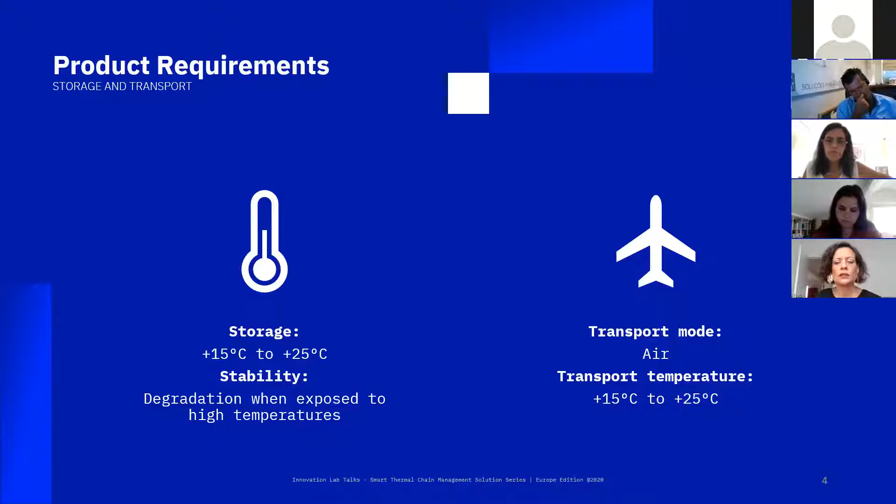Also, when it comes to transporting these products on a continent basis, like a Europe basis, the transport mode would be by airplane. Normally transport temperature can be maintained and should be maintained between 15 and 25 degrees centigrade. The issue arises when we look at the logistic flow of getting these products from point A to point B in Europe.

The products are in the storehouse, and specifically when it comes to temperature control, temperature is controlled during storehouse, and they go on to a truck that does the traveling from point A, the storehouse, to point B, the airport. During this transportation, temperature is completely maintained in the truck.

Then it comes to airport handling, out of the truck into the airplane, so airport handling and the tarmac area. And it's not possible to control the temperature there, and this is a problem we face.

And in air travel, during the traveling in the airplane, the product will maintain its temperature, 15 to 25 degrees centigrade again, with stability.

When they land in point B, we have again airport handling, and maybe we have a cool dolly. In airport handling, it's not possible to control the temperature. If the airport has a cool dolly, you can control and maintain it mostly. But if not, this temperature again suffers some changes.

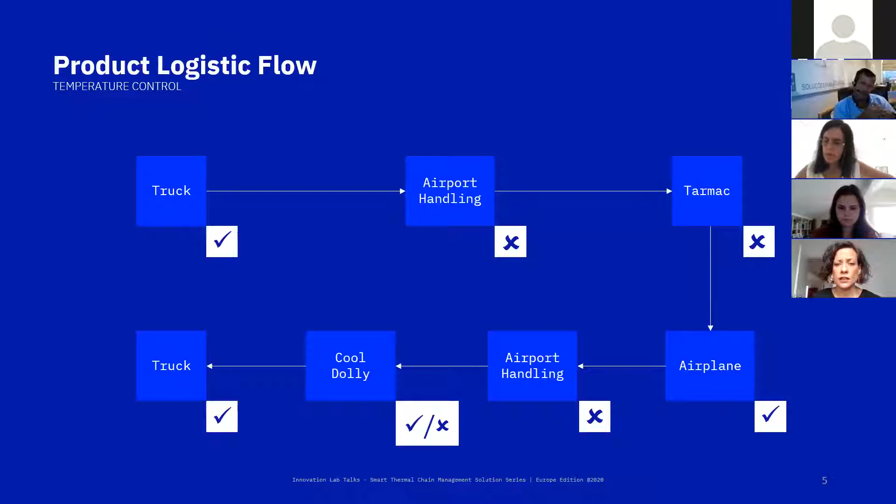Then the product will go again into the truck, and it will face again a controlled temperature setting. So as a summary, we can say that although companies and transportation experts can guarantee thermal chain integrity during transportation to and from the airport and during air transportation, the same does not occur during all the cross-docking operations in the logistics area.

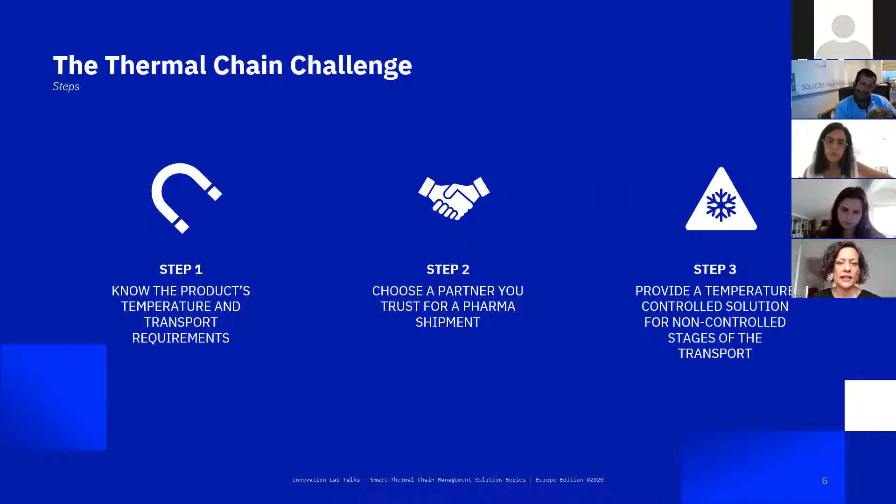So what is the thermal chain challenge? Well, first of all, managers need to understand and know their products and their transport requirements. And they need to choose a partner they know how to trust with this pharma shipment, in order to have a temperature controlled solution for the non-controlled stages of transportation. That's the main issue we're facing.

So to let us understand the solution that can be provided, I will pass on to Manuel Pizarro and ask you, Manuel, how do logistic managers answer these issues that they face? Hello, good morning to all.

In our company, our solution is to resolve this challenge. It's a normal challenge, and I believe we can answer to that. Innovation is the driver of companies, their sustainability, adapting to the needs of operations. So getting to the goal, this is the goal: the e-Kool smart cover.

I believe when you begin with this innovation, we map 3 scenarios where you have to make improvements. One of them was to create double protection in moments when air transport is very sensitive to temperatures, which is necessary, and cannot have temperature excursions. In other words, safe additional protection.

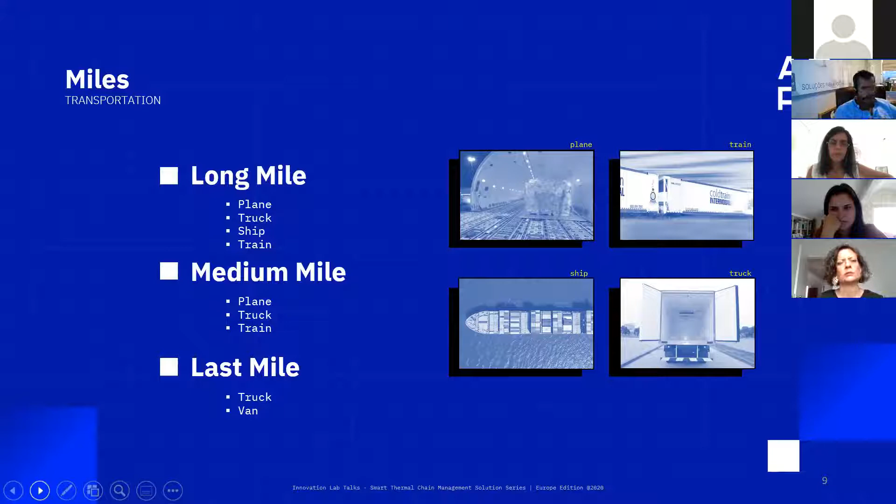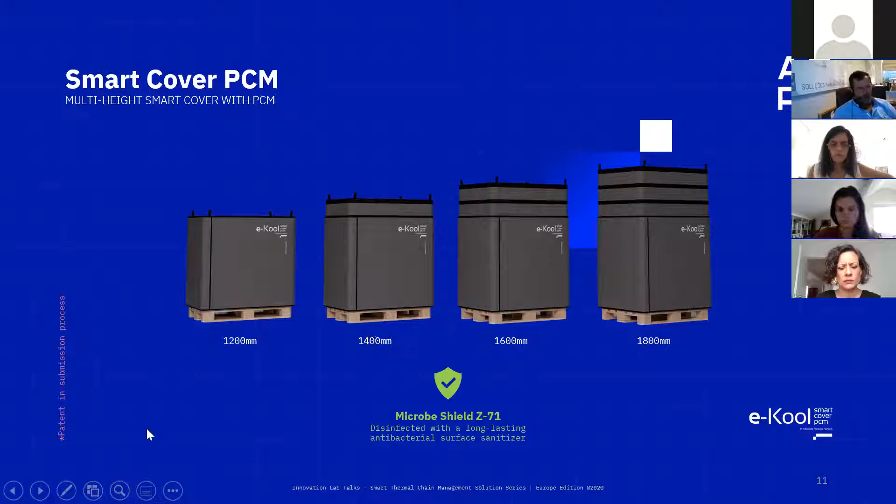This is what we try to do, the features of a multi-dimensional cover, more or less. Nowadays the planes must handle 140, 160, depending on the plane, it must be a special plane.

We already qualified the solutions, so we are beginning a lot of qualifying in the process, but what I found here is we can resolve this easily because we already did some tests with extreme profiles, under constant conditions, when we take 10 hours protection between 15 to 25 degrees.

So I believe more than 36 hours protection could be achieved, and we have in this challenge a mix of ambient temperature or temperature control. The only problem I can see here, though you may already have an answer for that, is the tarmac.

The tarmac is when the planes are parking, and it's a problem for thermal transport because the temperatures are higher there, and the influence of the motor and the floor is incredible. Sometimes we reach more than 50 degrees, and this could be a problem.

But when we developed this, we found we have a possibility to give this prototype a reflective cover, and with that, the tarmac, if it's not more than 5 hours, could not be a problem.

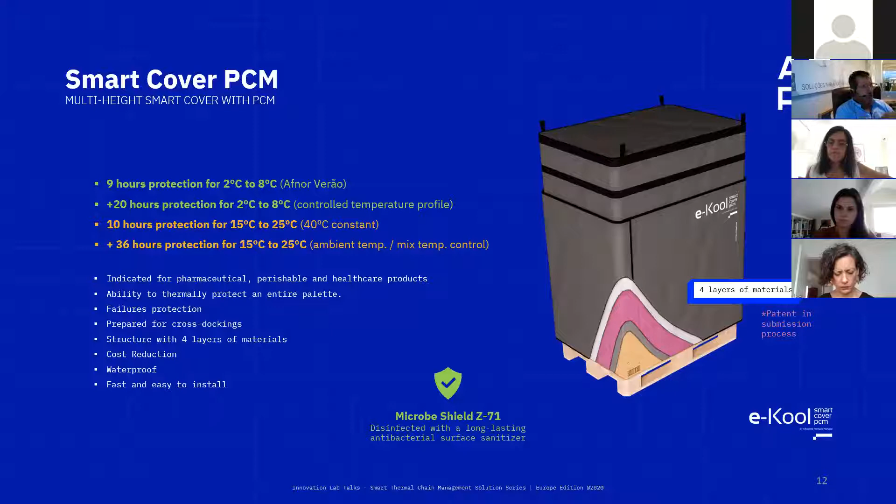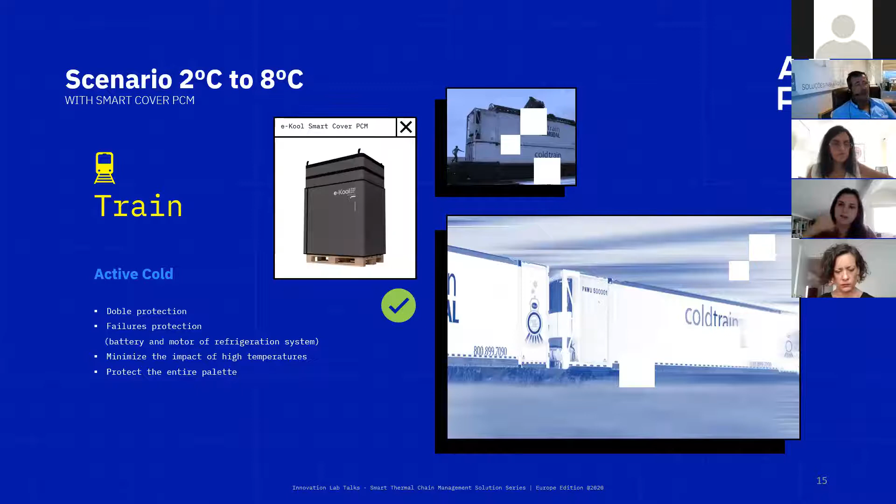This is what we have in this challenge. We have 3 cross dockings. First is the exchange between airport handling and the first airplane. Then we have the tarmac — you have a problem there, but you can use a reflective cover, and then the airplane. I believe it's not a problem because normally we have temperature control, and between 15 and 25 degrees we can manage it.

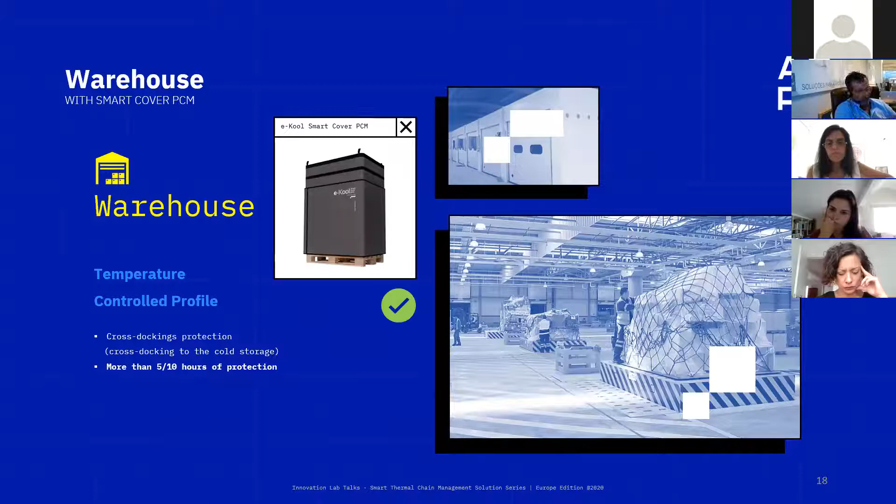And when you get to the airport, you have another cross docking. I believe this cross docking is at ambient temperature, but normally this is a fast move, so I don't see a problem, and I believe in this case you can have a cool dolly. A cool dolly is a small truck that can collect from the plane with temperature control. If you have it, it's good because we don't have excursions — we don't have reasons to have a temperature excursion.

And then you have the truck at the end, which may handle the last mile. When we develop the solutions, one of the things we try to do is map the routes to see the potential that we can have.

Here I can talk about Europe. As you see, in Europe we can make these routes easier.

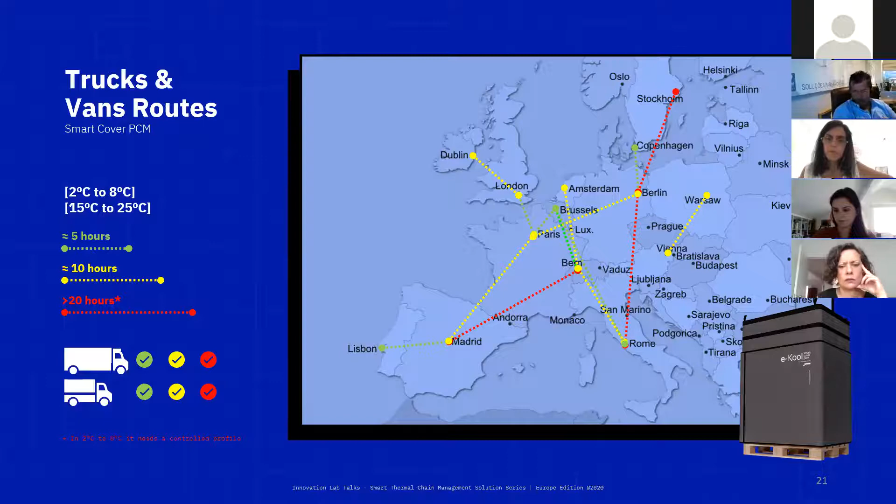You have routes, in yellow are the routes of 10 hours, in red are routes of more than 20 hours, and in green it's 5 hours. In 15 to 25, I believe we can do it, all of them. The only important thing is sometimes using temperature control, but 20 hours could be not a problem.

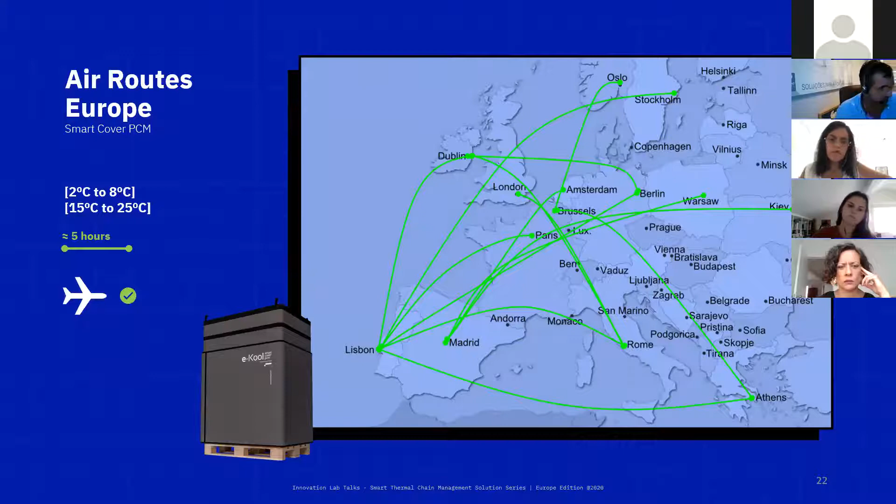If you have routes, and I don't know if this challenge is in Europe, but if it is, it's not a problem. As you can see in these routes, most of the routes you can do in 5 hours, and I'm talking about Lisbon to Athens, Dublin to Rome, Brussels to Oslo, so it's not a problem in hours. I believe the cover can answer this easily. If they need,

international route, it depends on the route, because if you have 10 hours, it will be the same as I already said in Europe, because 10 hours is not a problem, and in the airplane they use temperature control when the pharmaceutical goods are on the plane. So I believe it's not a problem.

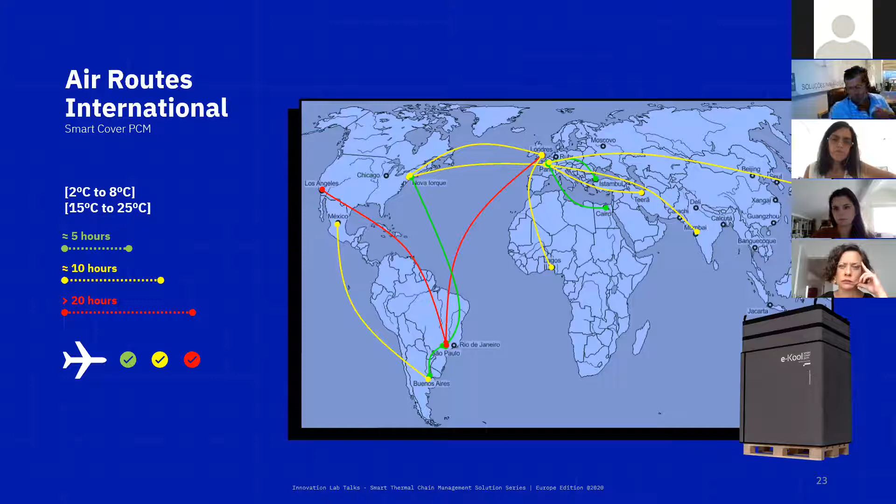Just to let you know, we already compared the standard cover and the others, and one of the things we tried to do was put color stripes for identification to simplify the logistics, because it's very important. When you collect goods in these cross dockings, you must know very well and identify which range of products you are handling. In this case it will be orange, and we have to organize it in a manner to not have problems in this stage.

And there is an important thing in this cover. We use PCMs. Normally, we can use it in active, cold, temperature control and ambient conditions. It's not a problem, and they can do all the operations with no variations and no exceptions.

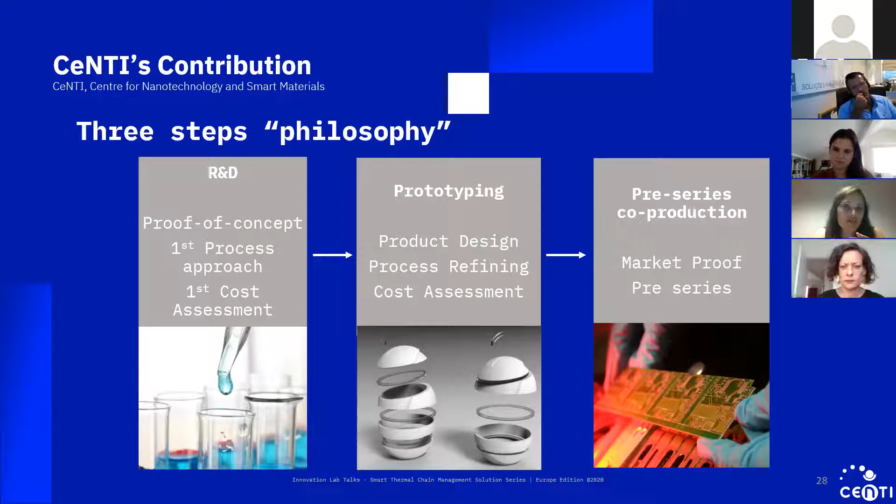In this project with APP, the main goal was the development of solutions for thermal management using phase change materials, which improve the thermal performance of the covers and increase the versatility and level of integration of this solution in this APP product line.

Our contribution was the development of the layer with PCM. We started with the selection of promising materials, namely 3D textiles and non-woven structures with high thermal insulation, as well as polymeric materials. In this selection, their costs and performance were considered, and we determined their chemical and physical properties, namely their thermal properties and absorption capabilities.

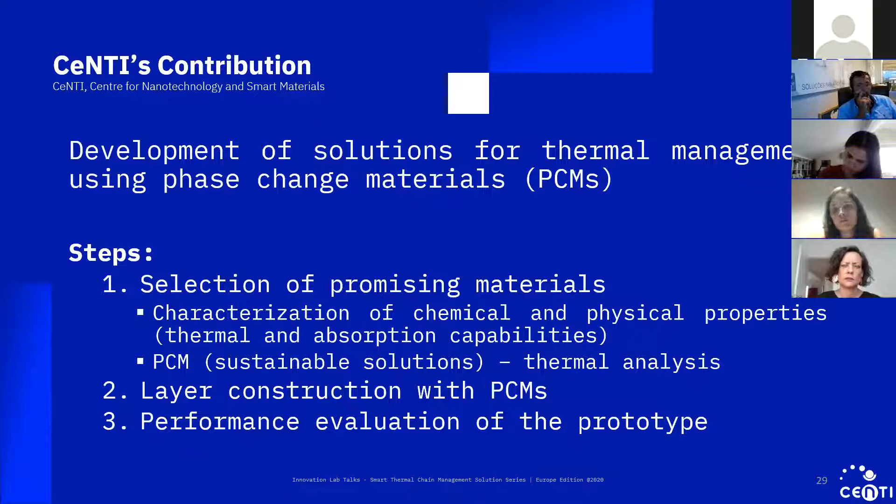Regarding the phase change materials, the chosen one was of vegetal origin based on oleic acids, taking into account its thermal performance and its sustainability.

After selecting the materials, the layer with PCM was built and their performance was evaluated. This evaluation was carried out by approximating the experimental simulation to a real scale. The tests were performed in a climate chamber where the structure with PCM was placed outside the product package, and over time the temperature was monitored with data loggers.

The temperature profiles followed were those of AFNOR winter and summer. The potential of the PCM layer in the cover was evaluated, and the structures were compared between them, with and without the PCM layer.

The results showed a significant increase in the thermal and energy capacity when we use this flexible layer of PCMs. For the most critical profile with high temperatures, AFNOR summer, there was an increase of 7 hours of conditioning until the system reached thermal equilibrium when compared to the cover without the PCM layer. Regarding the AFNOR winter profile, it reached 15 hours of conditioning.

Considering that this simulation was performed with an empty package, the obtained results were very promising, and in the future they can be even better.

This is the simple and sustainable science behind this product. Thank you very much for your attention.

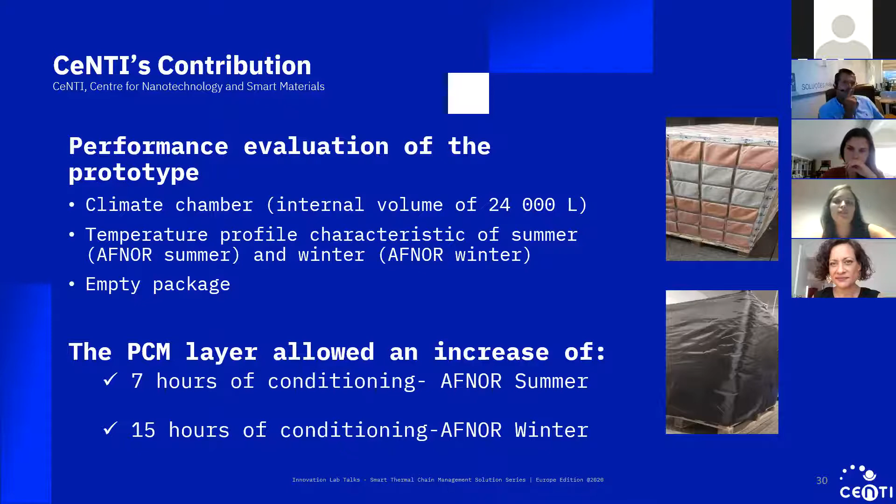From SmartKAI, what was the technological solution developed, and what is its importance in monitoring shipments? Albert?

Okay, can you hear me now? Yes, now I can hear you. Okay, sorry for that.

I'm working with SmartCAI, a company founded by Stefan Braun several years ago. He's been doing thermal engineering for more than 20 years. About 5 years ago, we introduced the thermal packaging software, which allows you to simulate the temperatures within a thermal packaging just on the computer.

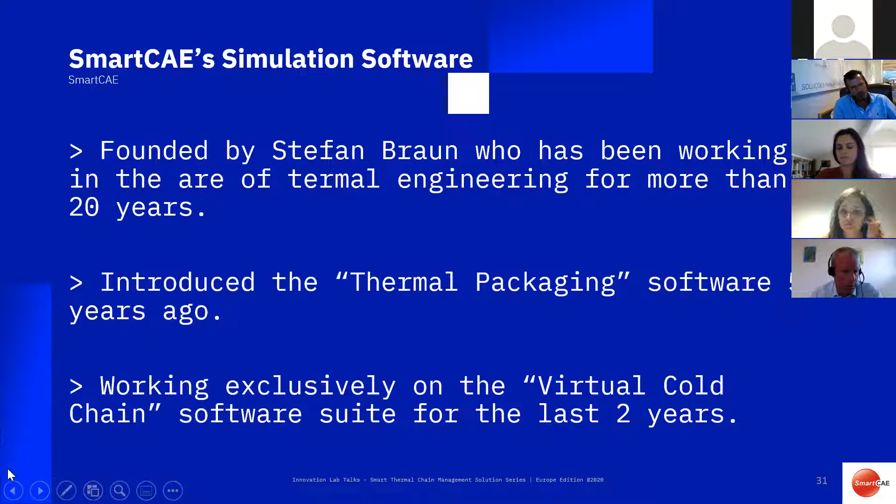And for about 2 years, we've been working exclusively on the virtual cold chain software suite, which is the following. There are basically several modules, and the core module is the thermal packaging software, which we call thermal packaging, and it allows you to define a simulation model of your packaging solution and your payload.

And when you then give an outside or ambient temperature profile, the software will calculate the inner temperatures of the payload or your sensors that you have in the packaging system. This is very useful for designing your thermal packaging systems.

You can, for example, check how changes in geometry or materials will affect the performance of a packaging solution. It will allow you to check whether a given packaging design will work for a given payload or a given temperature profile, because you would have to check that for changes in the payload and temperature profile as well.

There's typically not one single solution which fits all, but you have to recheck whether some combination will work.

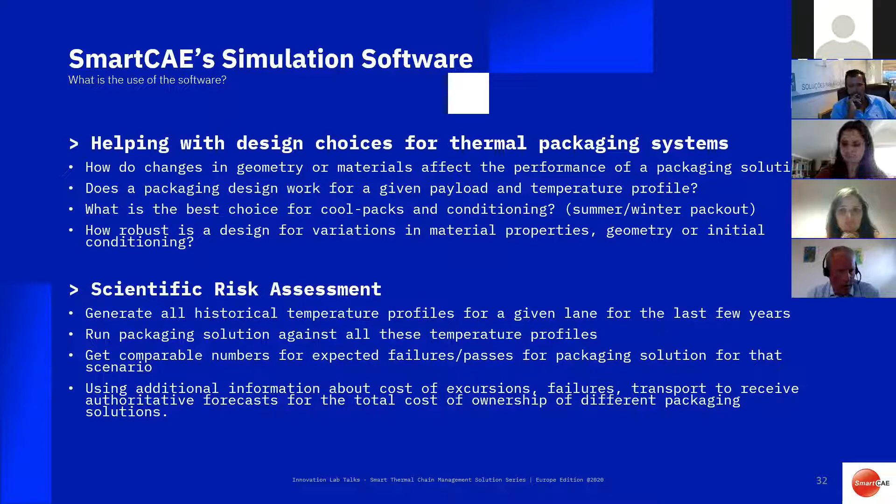Because we can calculate these numbers of failures, we can also go one step further and do something that is, I think, also quite unique: calculate the total cost of ownership of different packaging solutions when used for a given payload on a given lane. So you can compare how much everything will cost. I'll show a short example soon.

So for just the core package, which is the thermal packaging software, you have to define a model, a bit like Minecraft or a Lego model, where you define bricks and their material properties, and then you get a virtual model of your packaging system.

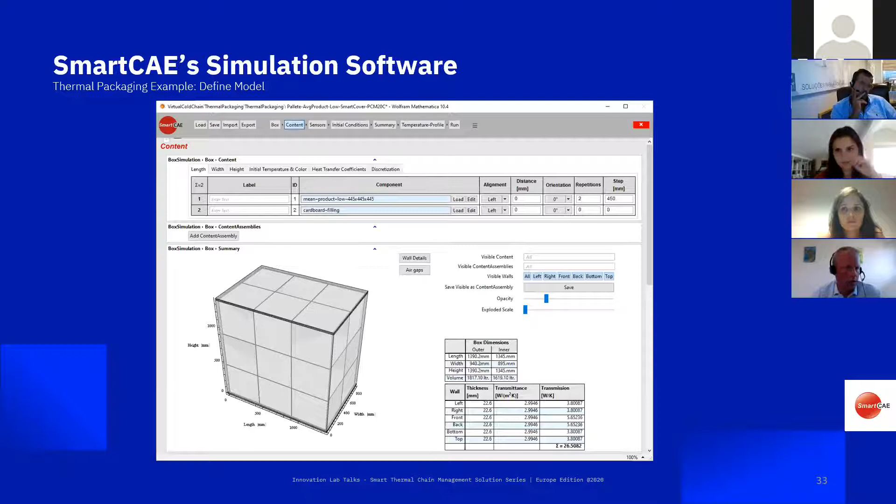You have to define the payload and all the components of your packaging system, like PCMs and insulation materials, and also, importantly for the cover, the surface properties, which decide how well it protects against radiation from the outside, like sun exposure, and also how something like hot tarmac will radiate onto the surface. All these effects are correctly treated by the software and go into the results of the payload temperatures.

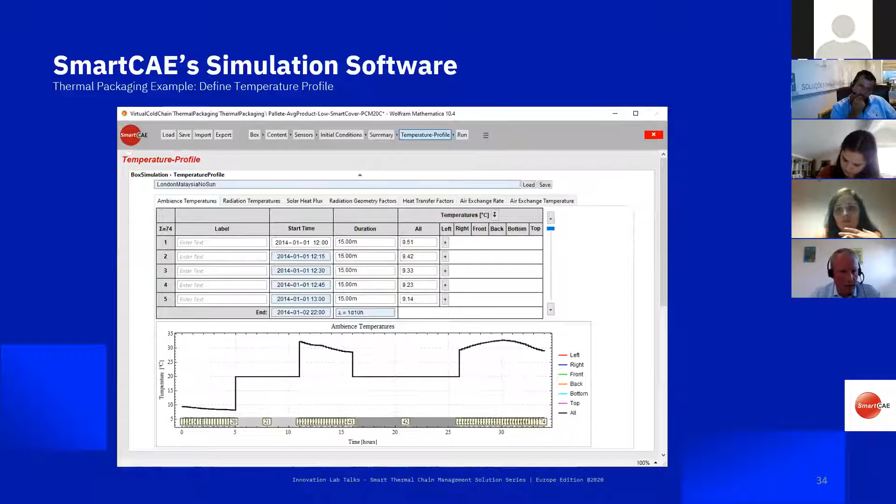You then have to define an outside profile. You can do this in a tabular way, or, as was done here, import it from measurements, and then run this profile against the model you defined to get the temperatures within the packaging system. You'd typically define some positions where you put sensors. In real experiments you wouldn't put that many sensors, but because everything is virtual, it's just as cheap as a mouse click to define all these sensors.

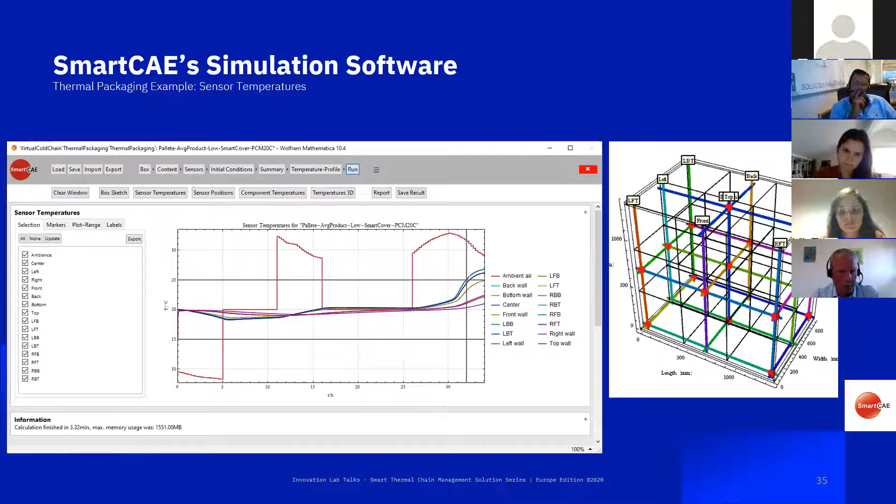Now, for the risk assessment part of the software, once you have these models defined, you can, for example, compare several versions. These are just some made-up covers, similar to the original smart cover, but not exactly the same sizes, and the material properties aren't exactly the same either. I made this as an example to show what you could do.

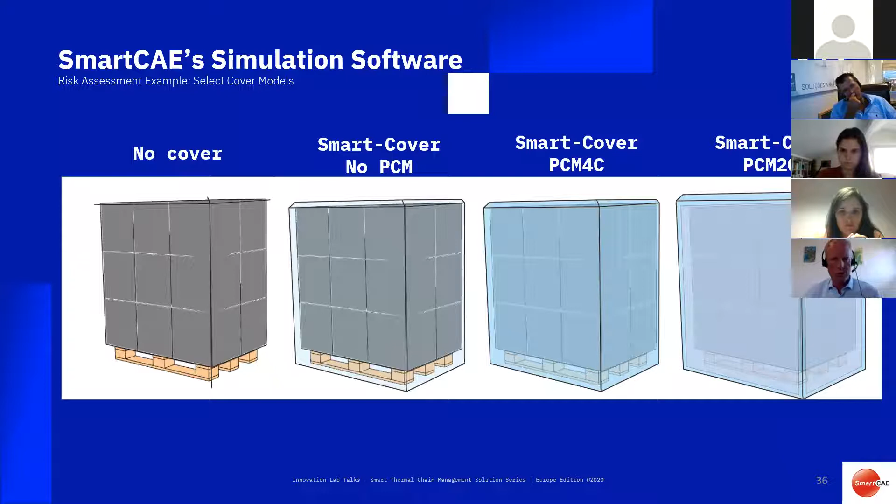In this case, we compare a pallet with no cover, a pallet with a smart cover but no PCM, and then the 4-degree PCM and the 20-degree PCM versions. We want to compare their performance for a lane going from Moreira to the airport in Lisboa, then to Sao Paulo and some final destination near Sao Paulo.

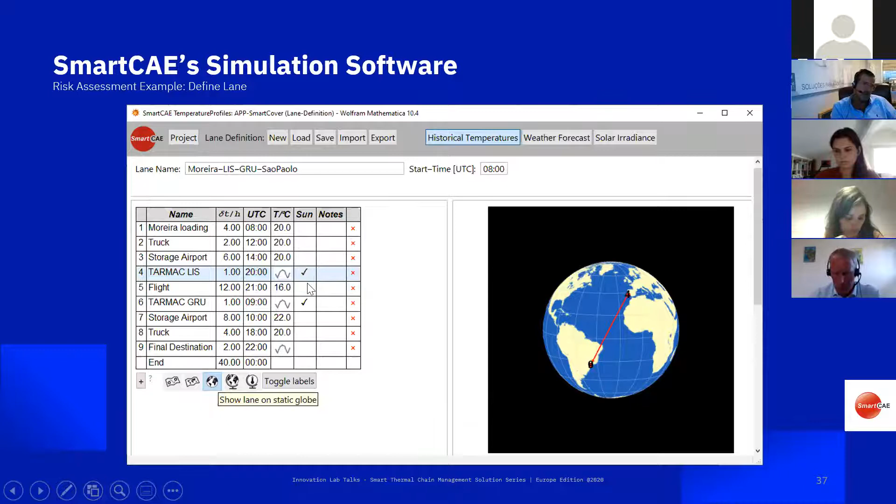You define your lane in a very simple way: where it is, for how long, and then give either a constant temperature for controlled conditions, or, for example, on the tarmac where there's typically no temperature control, the temperatures as they'd be measured at that airport. You also define things like sun exposure. With that information, our software generates a lot of profiles as they would have been seen if you'd sent a shipment on that lane over the last 2 years.

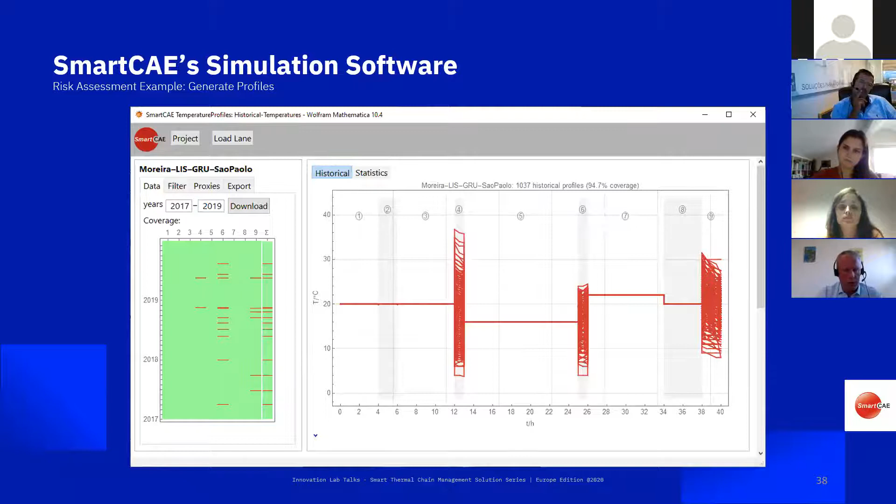You can see here that about 1,000 historical profiles are generated, and what we now do is run these 4 models against each of these profiles. As a result, we get how many failures occur for each of the solutions.

The version with PCM, either 20 or 4 degrees in this case, passes completely for all months. For the cover with no PCM, there are some failures, especially in June and August and in the winter months. And without the cover, you'd have failures in every month. So you get quite detailed information about how you can expect your packaging solution to perform.

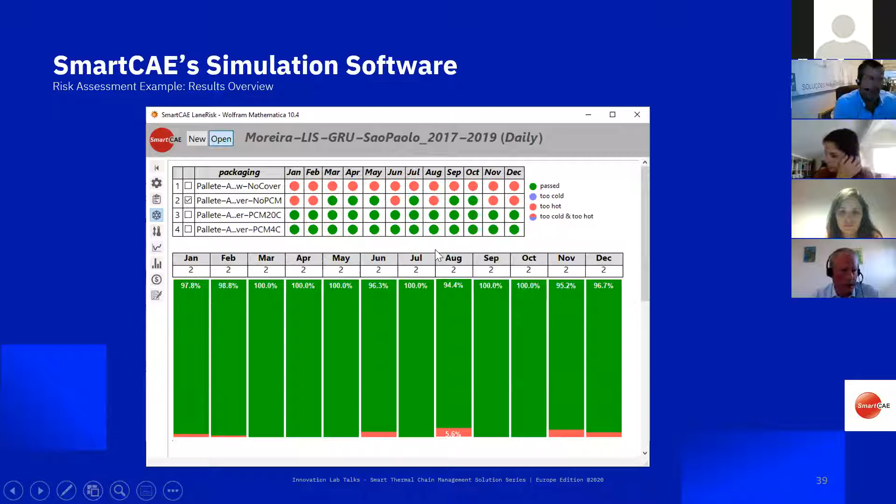Last but not least, once you have these failures, you can assign costs to the packaging solution itself and to its transport — they have different weights, so transport costs depend on weight and aren't the same. Then there are typically costs for excursions, and if an excursion is bad enough you lose your product, which also causes costs. Taking all these costs together gives you a total cost of ownership. You see that in this case the 20-degree PCM, unsurprisingly, is really the best choice, and you can also get numbers for how much more expensive the other solutions would be.

So this is basically our software suite, and our contribution was to provide this software suite to the engineers at APP and also give them support in how to use the software. So I think that's it for me.

Thank you for listening. Thank you very much, Albert, for your contribution for this presentation and for explaining us the digital technology that's behind it. So I would ask now Professor Cristina Silva and Beatriz Bernardes, how did the contribution and the partnership with Universidade Católica materialize on the development of the solution, and what were the main goals of this partnership?

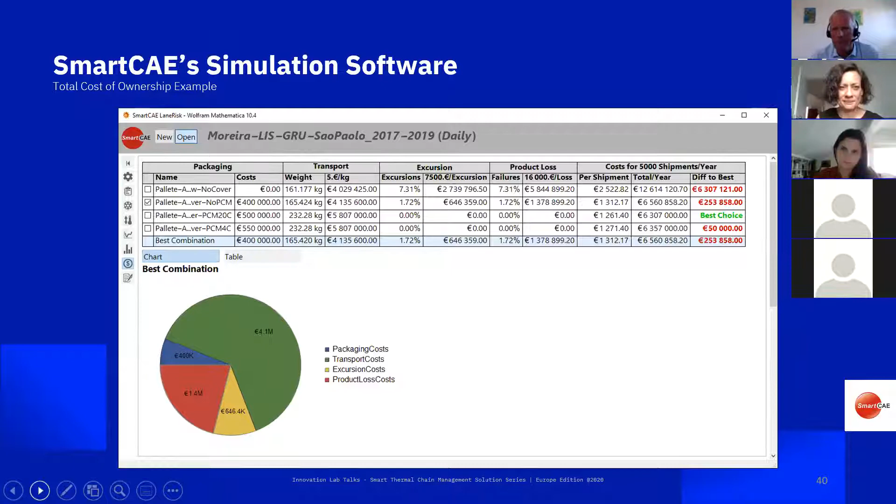Good morning to everybody. Are you listening to me? Thank you. So I was very fortunate because I had the opportunity to be contacted by APP, who asked Catholic University of Portugal to do consulting work in this project.

So the main work that I helped the most was on the optimization of the thermal performance of the solutions, a cover solution that APP was developing. So the main objective was to try to extend the transportation time within a certain temperature range, for example, for pharmaceutical materials between 2 degrees and 8 degrees and other ranges.

So I did work together with Beatriz and also in collaboration with all the team in APP, namely João Santos, Nuno Meireles, and Manuel. So with the knowledge I have on transport phenomena and heat transfer, we tried to study together with CeNTI what would be the best materials to prolong the shelf life. One of the things is to increase the thermal resistance of the materials.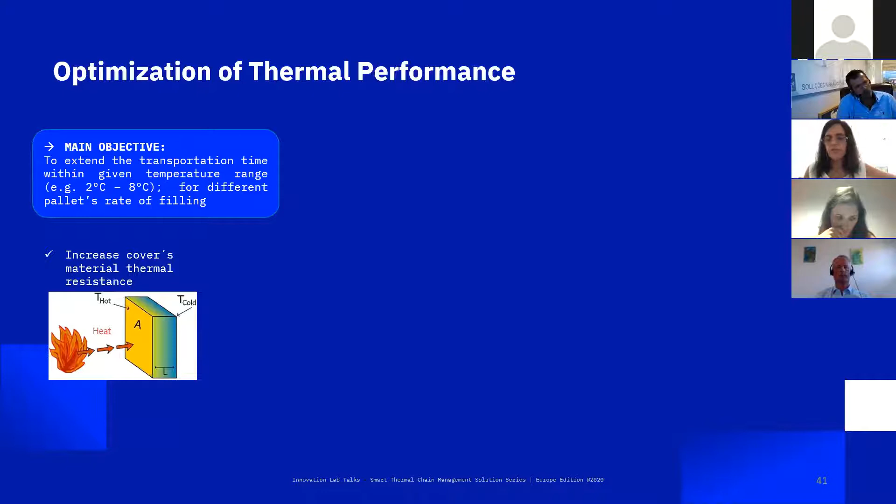So this is a picture of how it works. If you have on one side a high temperature, for example, if you are distributing in a tropical region, the material of the cover should avoid that this high temperature arrives to the product, as shown here in the picture.

The other option was to include PCMs, which is also called clever thermal mass. The PCM is a material, there are different PCMs, but here the option was to use a PCM between solid and liquid. So the solid, when we supply energy, rises its temperature until it arrives at the phase change. During this phase change, the temperature is maintained relatively constant until the solid becomes all liquid, and then the temperature increases again. As you can imagine, with this solution, it's possible to keep the interior of the cover at a reasonably stable temperature.

And this works - I gave the example of a tropical region, but this works also on the opposite, because some materials cannot go to temperatures lower than 4 degrees, 2 degrees Celsius, so it works the same way. The PCM absorbs the energy and delays a lot the response of the system.

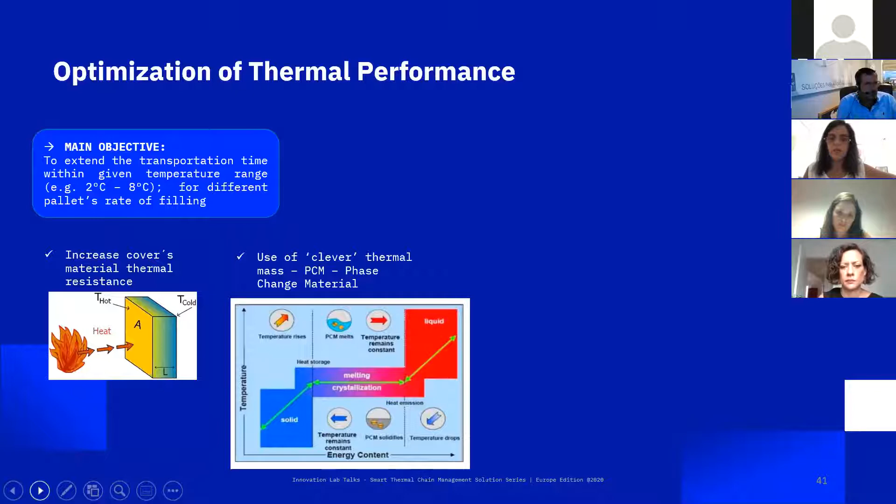I helped also together with all the team to use the SmartKAI software and take profit of all the advantages that Albert already explained. So we had a range of different materials, and with SmartKAI, together with all the team, we were collecting properties of all the materials, including in the software, and simulating what could happen under different solutions.

So this is where the optimization comes in, because of course if we can put a lot of PCM, we can easily extend a lot the transportation time at a constant temperature. So we tried to arrive at a good solution with a good balance of materials that would not be, for example, too expensive.

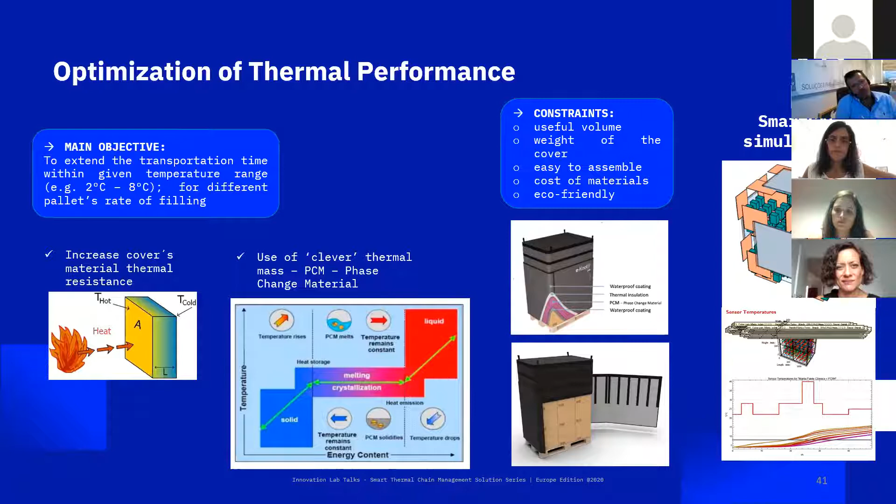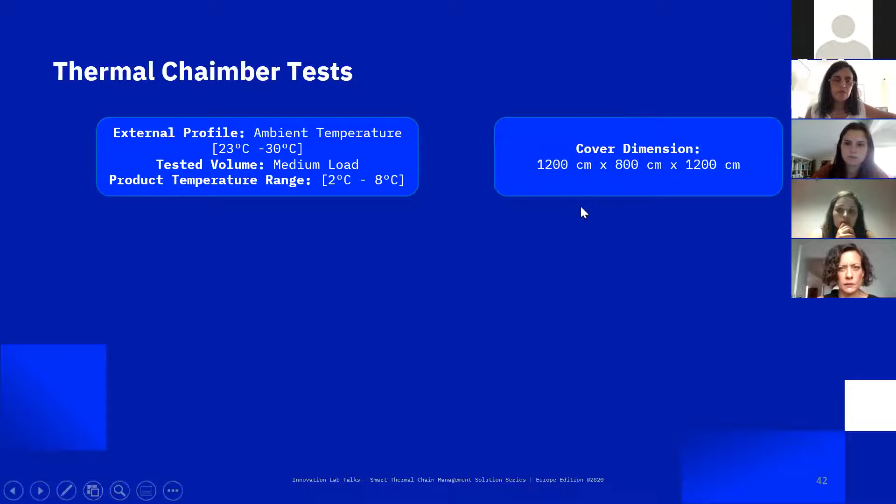During the development of this project, several tests were performed to evaluate how the materials used in the cover will improve its performance. I show you in this presentation

the ultimate test that was made in the thermal chamber, comparing the smart cover PCM with a standard cover, for a product temperature range of between 2 and 8 degrees. The test was made in the same conditions, the same external temperature profile between 23 and 30 degrees, and with medium load, and 6 temperature resistors were used in each cover at the same position.

The initial product temperature was 4 degrees, and the test started. Based on the results, it's possible to verify that the smart cover PCM has a better performance.

The worst point was at 5 hours 50 minutes for the smart cover PCM, and comparing with the standard cover, the time was less. The standard cover maintained the temperature below 8 degrees during 3 hours and a half.

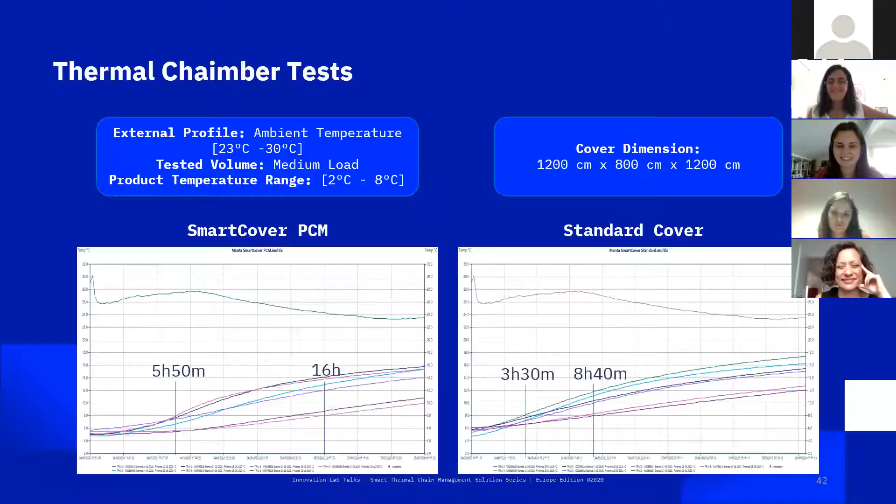Thank you. Thank you so much, Beatrice. We will have questions. We do have questions already for our speakers, and we do have questions from the audience. I would remind you that if you want to ask a question to a speaker, you should share it on the Q&A chat box and direct it to the speaker you want to ask. But my first question will be to Manuel.

How did partnering up with multiple institutions help in the innovation in thermal chain? Why did you go this way to find innovation and not do it by yourself in APP?

It's very easy to answer, because if you only do it in your company, you are trying to be commercial, and this is the important part. We used specialists like CeNTI, Católica, and there was another guy who died during this project. It was Joaquim Tutor, a specialist in nanotechnology and materials.

It's completely different, because we are always looking for very good performance, but with this kind of synergies and specialists, we can get new materials, new experience that is already being developed, and also we save time using these specialists in these situations.